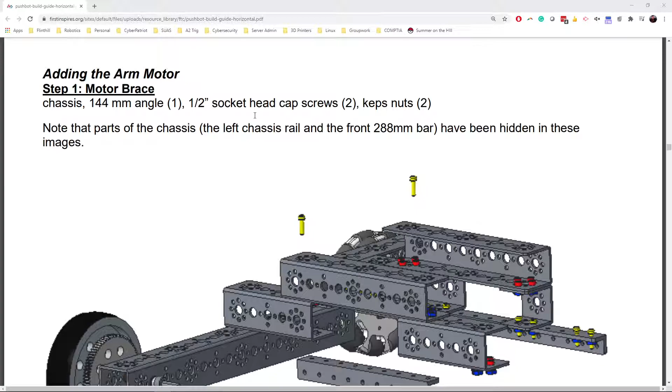One thing to note as we assemble these is that it will be offset a little bit. So instead of being the top hole in the hole pattern on Tetrix, it will be offset at the 45, both to the right, looking at it from underneath. So when we place it there, that's where it will be. Let's go over to Fusion.

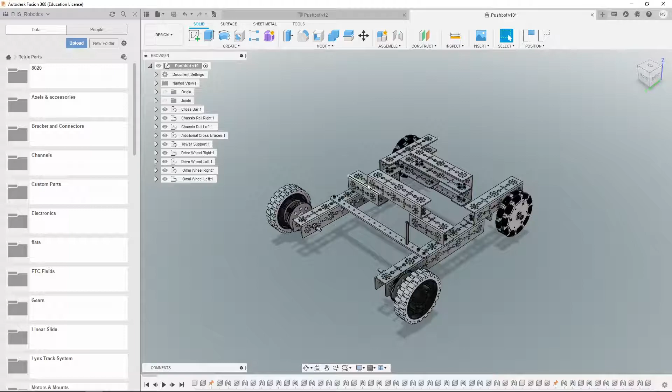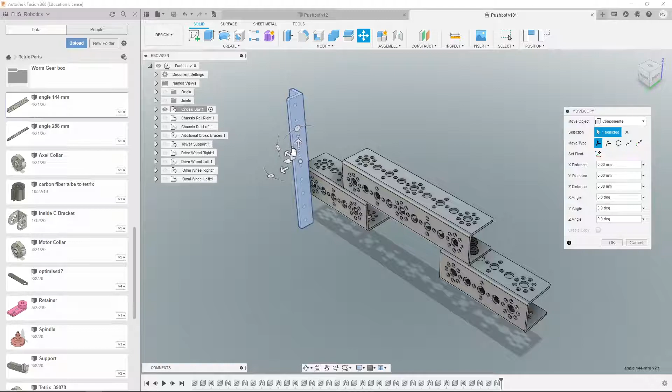Here's our Pushbot. We want to just look at the crossbar, so I'm going to hide the other components. We're going to go under crossbar and make that our active component. Let's go ahead and bring in the angle 144 millimeter. And I want to orient that so that it's in the correct position. That out there.

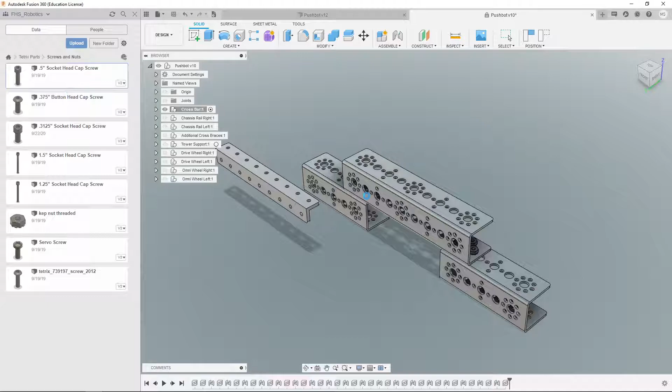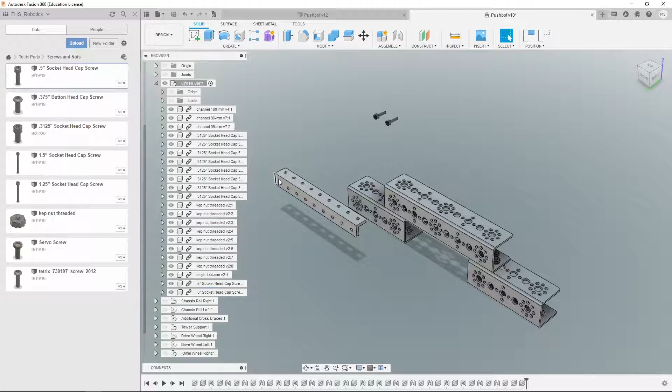Let's bring in now our screws. Screws folder. There it is, screws and nuts. We want the half-inch socket head cap screw. Want it on the back side here, won't we? Capture that position. I want 2 of those. Copy and paste. 2 of those and 2 of the kep nuts.

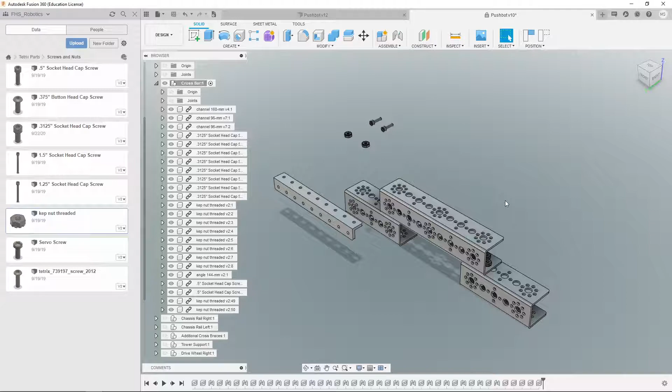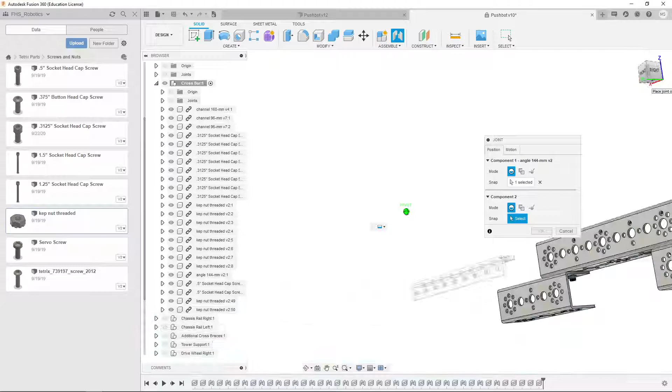Orient that. Let's copy and paste one more into our design. Okay. We got all the pieces. Let's go ahead and put them into position. Now, if you were actually building this, what I noticed when I was putting it together initially is that it doesn't quite match up. To make sure this is rigid under motion, I would not quite tighten this angled bracket up all the way until my motor mount is attached.

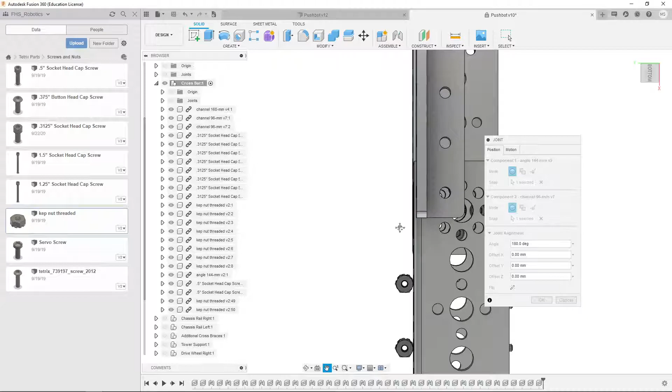So I would loosely screw it together, but make sure that there is some room, because if we look at the bottom up, it doesn't quite line up here. There's a little bit of a gap there, and so when we put our motor mount on there, we want to make sure that we have some wiggle room and those holes are lining up. Make sure there's enough room to play with these pieces so they do line up correctly.

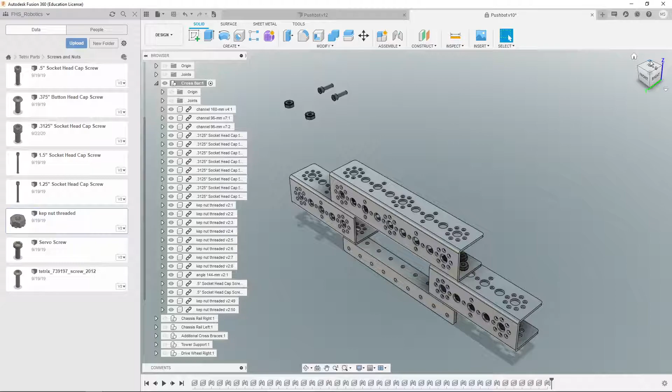I'm going to swing around and look at the back side to put these screws into. There we go. Select our joint tool, and that menu came up in just the wrong place. Okay, that is going to go in over there. Nope, that missed it completely. Doesn't even exist right there. It's this one that I want. There we go. Okay, for that one, another joint here, and this one is on this far side. There we go.

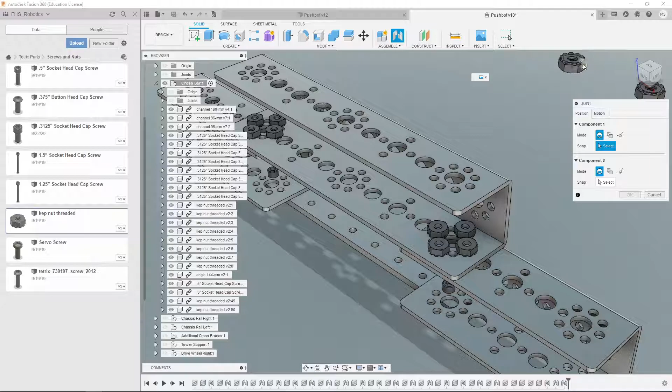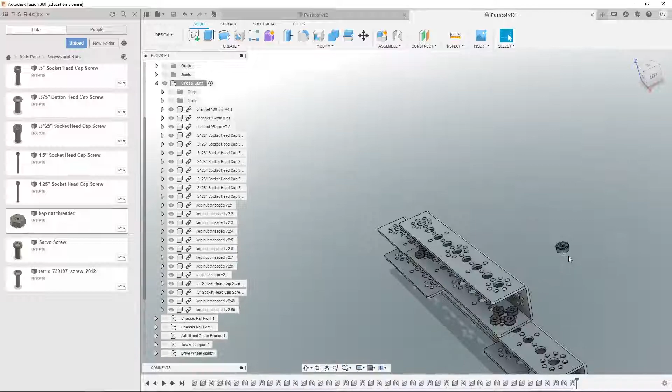Another rigid joint between the nut and bottom part of this 144 millimeter angled channel. There we go. Capture that. Joint between that and swinging around again. Bottom part down here. Good. Okay, from front, there we are. Let us add our motor mount now.

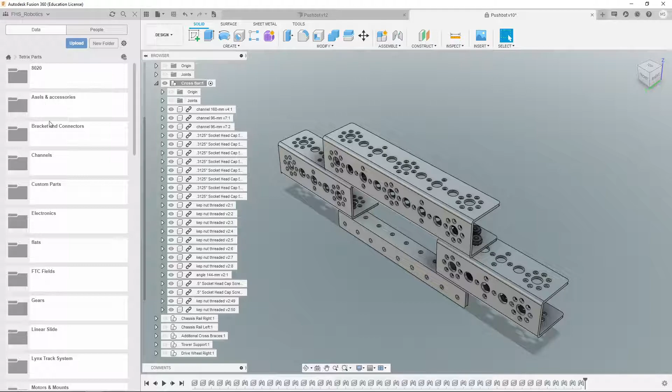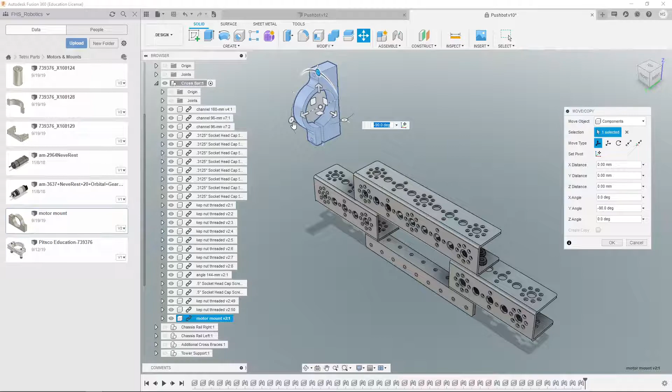So motors and mounts. Grab our motor mount. And as we put this in, there's this adjustment part where you tighten it down to make sure the motor is rotated in the correct position. We want that pointed down according to the instructions. I assume they've tested it out and made sure that it works better down than up. So we're going to put that in there.

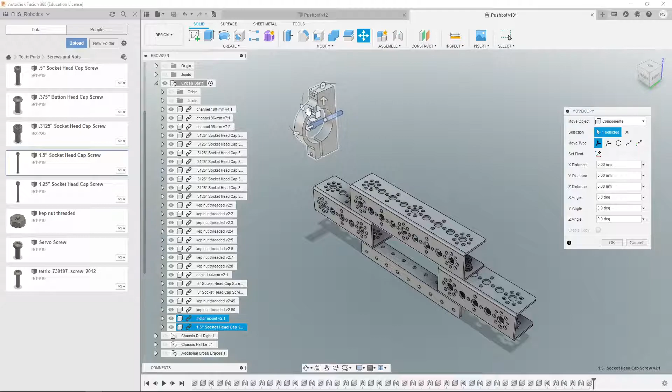And then under Tetrix parts, we're going to go under screws and nuts. We're going to add the 1.5 inch socket head cap screw. That's what comes with these motor mounts. And that is already in the correct position. I'm going to make a copy of it and paste that in there. And 2 kep nuts.

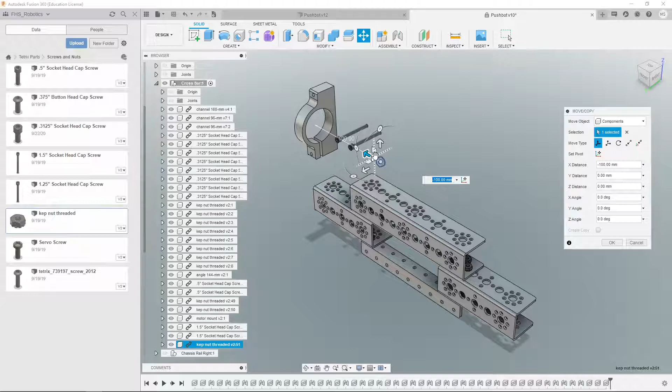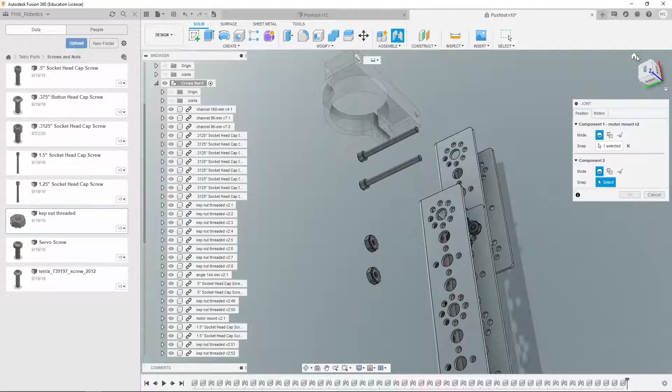And I'm going to flip that over. Actually, when we put it in, let's have it that way. It'll be easier to grab, and then we'll just flip it later. Copy and paste another one in. Perfect. Okay. Now swing around to grab the back side of that motor mount, rigid joint between this hole here and it's going to be up here, and it's, I believe, just offset.

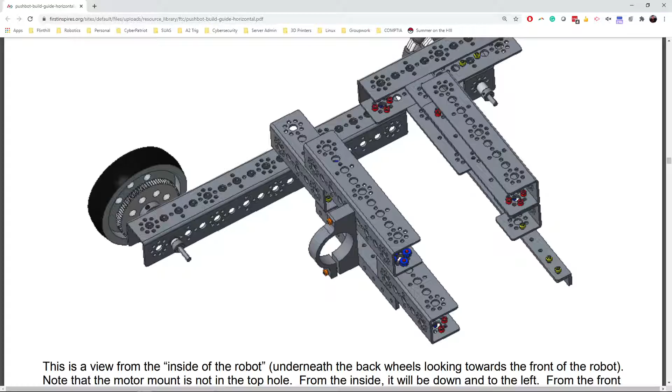But let's check. Let's look at the instructions. Where do they say to place it? So in the middle of those hole patterns, yep, just to the side. To the right side if you're facing the robot. So that'll be this hole right here. Good. Okay, we can check and make sure those holes are lining up. That one looks good. I'm going to pan down.

And see here, this is what I was talking about. It doesn't quite line up. So you want to leave these longer screws over here loose so that these holes will line up. Also, this has to be brought forward just a little bit. So it doesn't quite work, but we're going to make the best of it by tightening this motor mount first and then finishing tightening up these 1.5 inch screws.

So if you're overseeing a project or doing this build yourself, make sure you do that first. You could even attach the motor mount to this bottom part first and then this 144 millimeter bar and then screw it into place. That could work as well. Okay, let's place our screws.

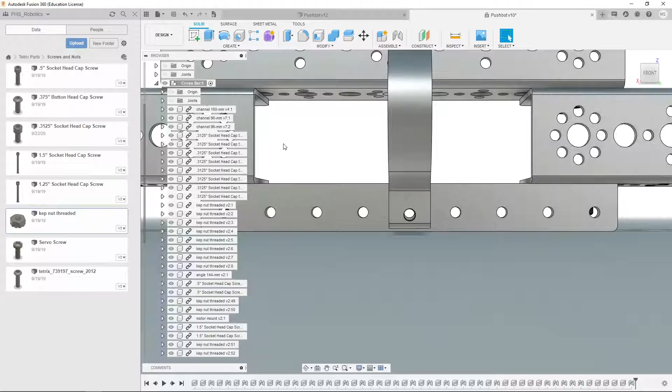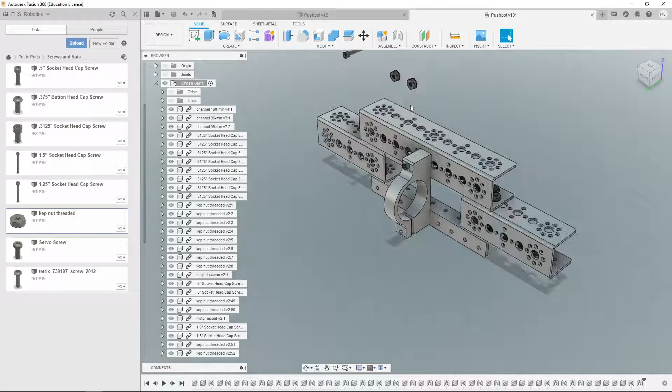Here, create a joint between that screw and this hole right here. Okay, it's in place. Swing around again. Zoom in to that screw. I want a joint between the shaft of that screw and the bottom hole of the motor mount. There we go. Okay, flip around to the other side.

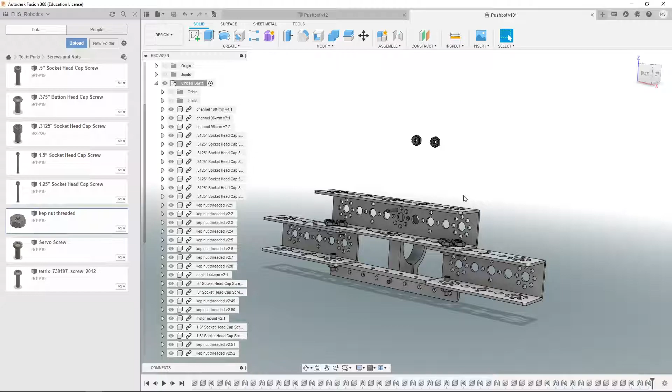Let's put the nuts on the screws. Position where I can see them both. There we go. One thing I like to do when I'm building is I like to swap out these 1.5 inch screws for the part that's not adjusted on that motor mount. If you use that, then these come out to be the same length. It looks nicer. Will it work the way it came in the package? Yeah, works just fine. But if you want a different look, you want to have those be symmetrical. That's one thing I found I like. It just looks a little nicer.

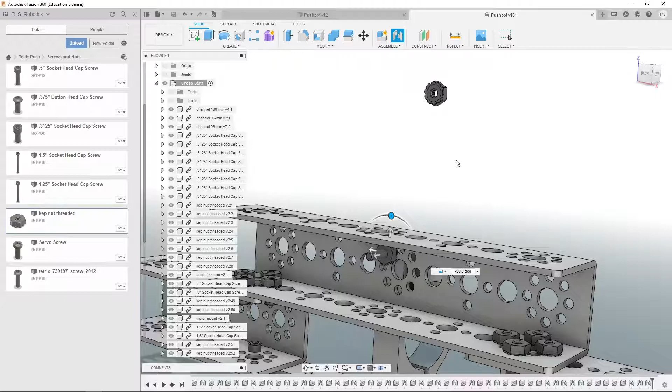And we're going to need to flip that over. There we go. Last joint between this kep nut and the lower end. And we'll flip that around. So here's that little gap I was talking about. I matched up the kep nut with the hole on the bar, the 144 millimeter bar, not the screw. So you can see that that's just off by a little bit. If we loosen up these screws in the real world, that will drop this down a little bit, and we can screw that together first and then tighten up these screws here.

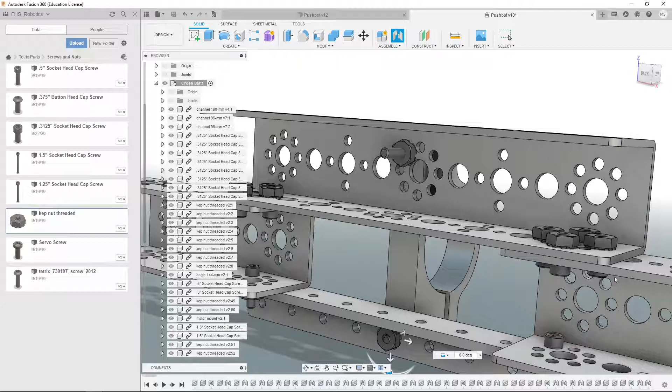All right, so we have placed the motor mount on. Now we are going to move on to adding the motor. The directions call to add one of the older motors, the Tetrix motors, and we are going to use instead, let's go to the motors folder, the NeveRest. I'm sorry, yep, this NeveRest up here, not the 20 orbital gear, but the regular NeveRest. And you can swap these gearboxes out for 1 to 20, 1 to 40, 1 to 60.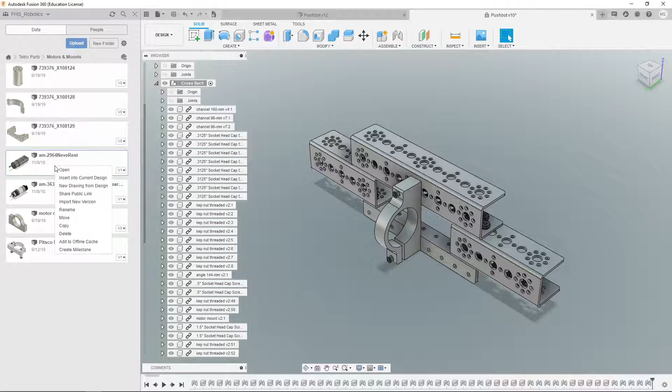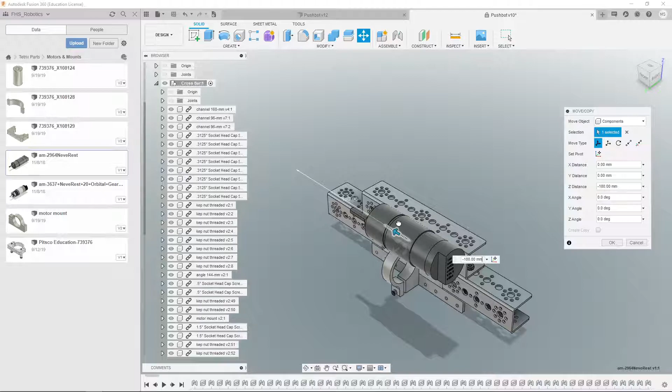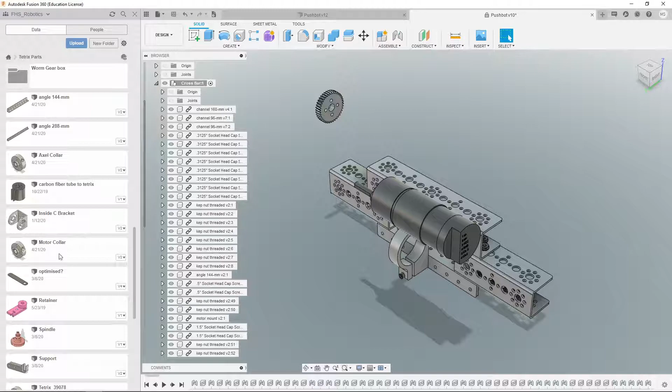Let's insert one of those into our current design, and I'm going to rotate it over so that the shaft is pointing out to our left as you're looking at it from the front. And bring that over and back just a bit, so it's in line there. We also need to grab from the gears a 40-tooth gear. It's already positioned correctly. We need to scroll down to the bottom to a motor collar. Take that this way.

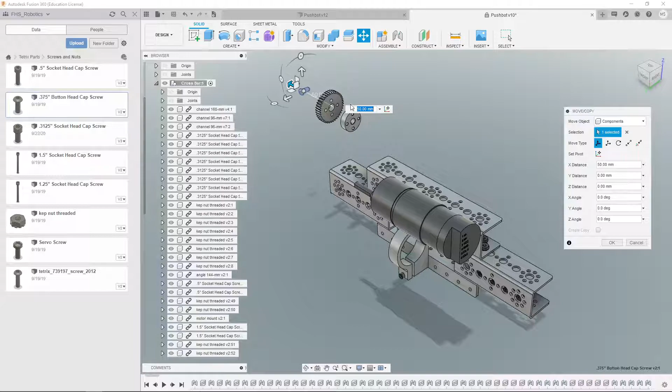Okay. And the screws that will work with all of this. We're going to go up to the screws and nuts. We're going to pick these 0.375 inch button head cap screws. And we will ultimately need 4 of these. Bring that out there. That's 1. Copy. Paste in 2. Control V. Paste in 3. Control V. Number 4. Great. So we have all the parts.

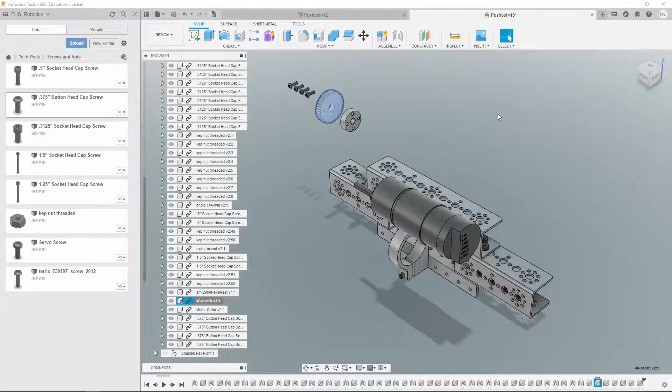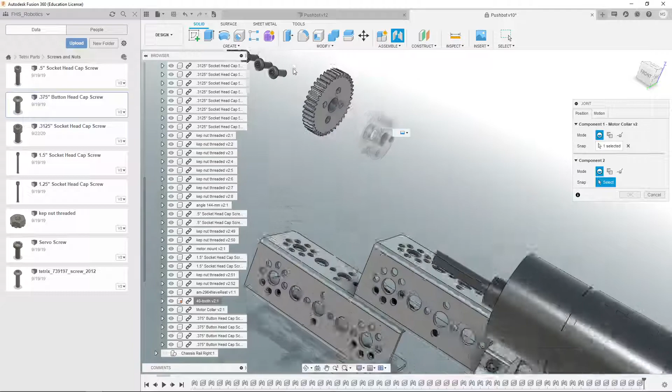I am going to make the 40-tooth gear grounded for the next little bit as we join these together. The first joint I'm going to make is between the 40-tooth gear and the motor collar. Looking at the motor collar with a little extrusion, this little extrusion should always go into your gears. I'm going to grab that ring there, and grab this inner ring there of the gear. And let's swing around and make sure those holes all line up. They do. Very good. Let's capture that.

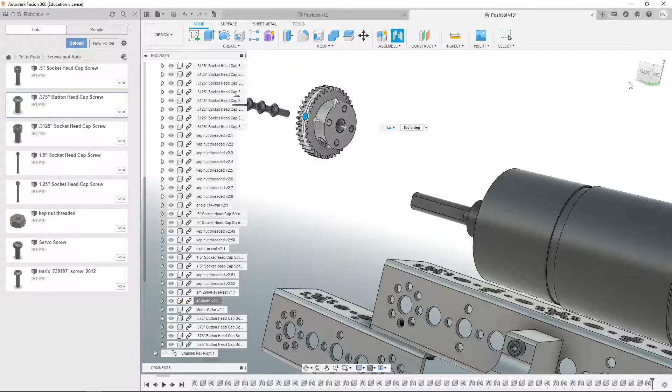Swinging around to the back here. Let's place the screws into these 4 holes now. So joint tool, grab the top of that shaft, place it in there. Capture that joint. There, into there. Oh, that one got flipped. There we go. Joint. You go in here. That looks better. And joint. This one goes in here. Okay.

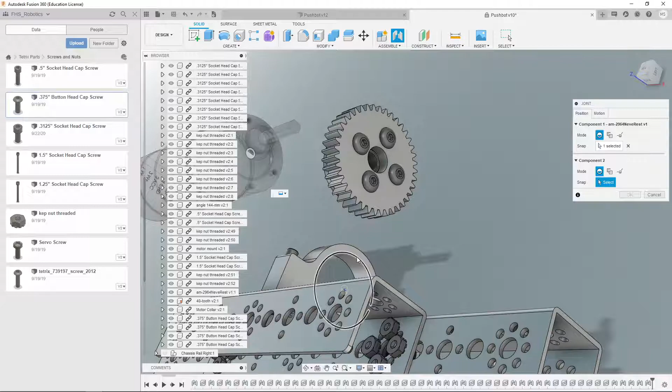Now we want to add the motor. Let's place the motor into the motor mount. So join, this is going to be a rigid joint between this motor and this motor mount. There we go. We're going to keep it flush for now. We may adjust it later as we add the arm to get our gears to match up. But for now, it's exactly where we want it.

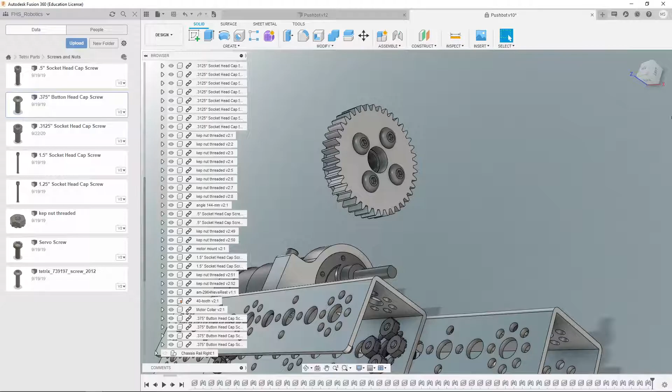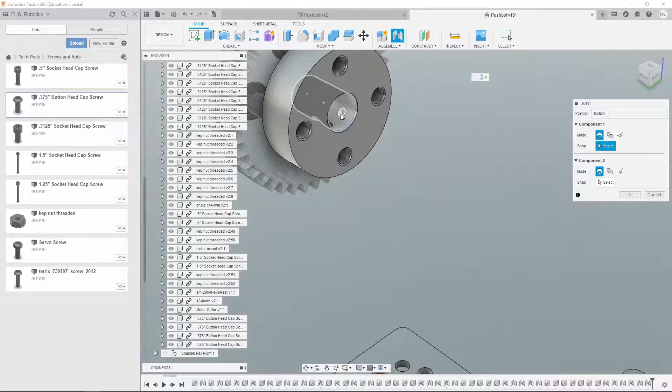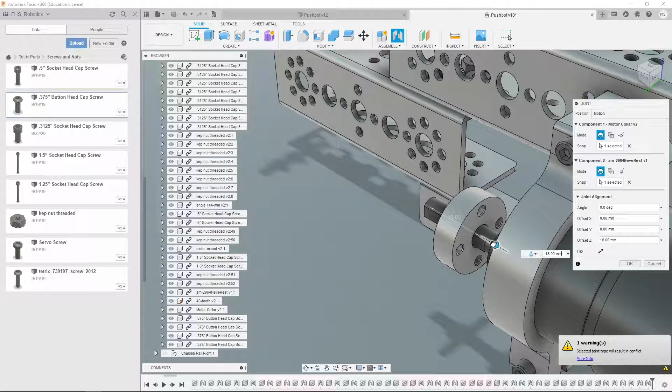Now, because this motor is a solid piece, this motor axle will not turn. To fake the motion, we're going to turn this motor collar on the axle itself. So let's take a look. We want to take this motor collar and create a revolute joint between this empty part of the shaft there and this shaft there. We want to slide it on, and again, this is an area we can adjust to get it to mesh up. We have a little bit of room. Let's put this on most of the way. Like that. Click OK. Oh, it's resulting in a conflict because I forgot to unground it. That's why.

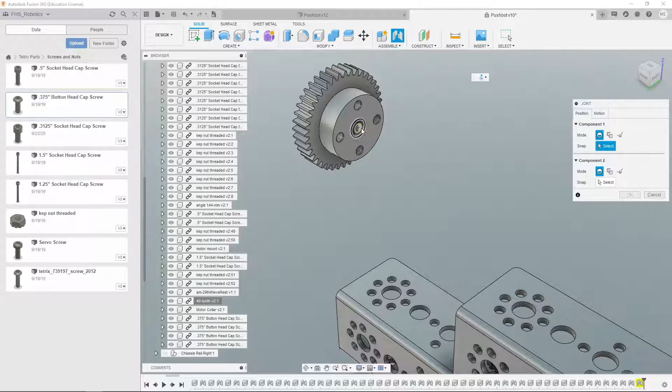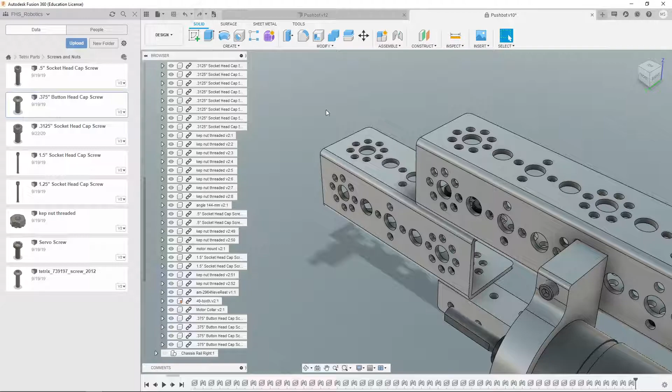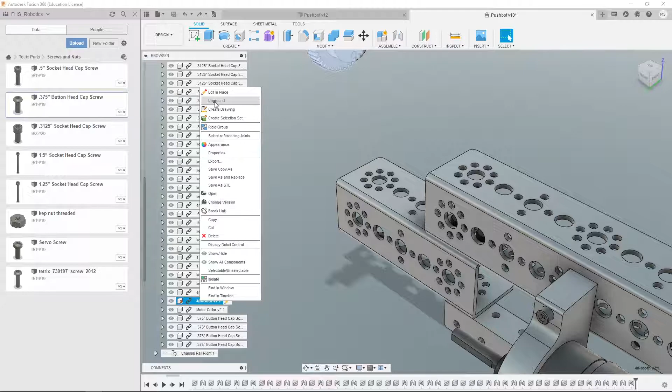One more time. With feeling. Revolute joint, position. Select this interior space. Axle shaft. Oh, it says it already exists. Let's undo that. Undo joint. Which joint is that? That's not the motor, is it? It was the motor. Let's redo that one. Okay. Now let's create our joint. Motion, revolute, position. This void, to this. Oh, I keep forgetting to unground it. I'm going to create the same problem again. Unground. Okay, now let's do this.

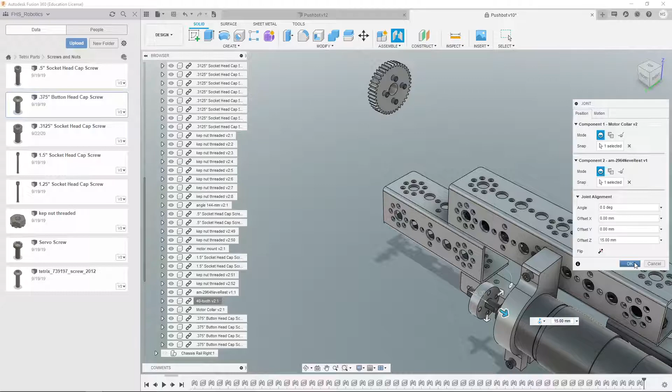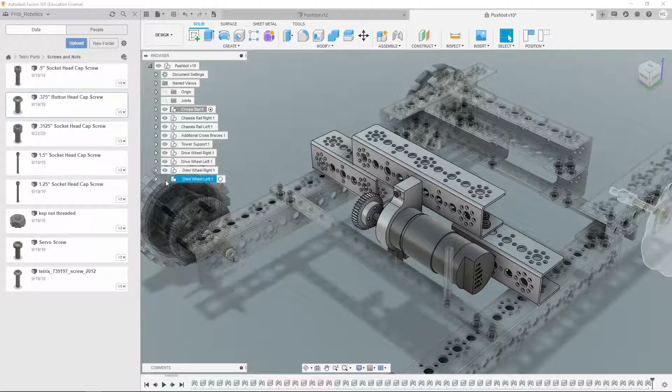Joint. Revolute joint. Position between this void and this axle. Great. We're going to slide that on there. Let's go a little more than halfway on. Great. And now if I grab this, I'm able to revolve it around. All right, that looks good. I think we're done with that now. Let's go ahead and turn everything back on, and let's make our Pushbot the active component so we can see everything, otherwise it gets that ghosty look to it. There we go. There's our Pushbot so far.